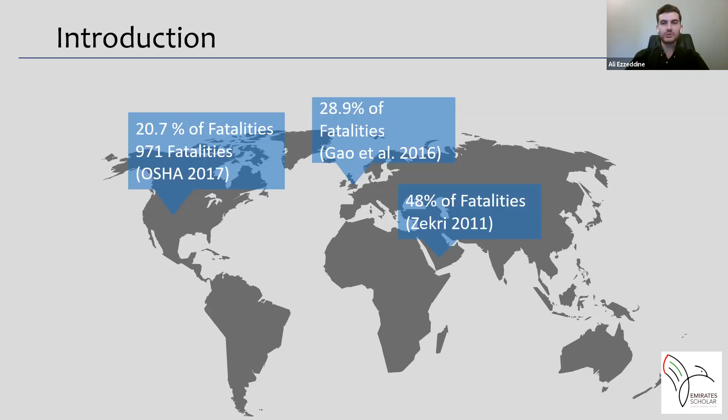And one way to mitigate safety hazards is through the proper implementation of training programs. Thus, more research in the past years has focused on enhancing safety training in construction. And one way researchers are enhancing safety training is through the use of game engine technology. So game engine technology started to gain popularity in construction around 2009, where Zhao et al. developed a training simulation to train excavator operators on how to safely maneuver in close proximity to dangerous electric hazards.

Then researchers started integrating 4D with safety training in order to create a more realistic training environment for the workers, based on the current construction phase of the project. And more recently, researchers are investigating the use of augmented and virtual reality to create a more immersive training environment. So all in all, research has shown that using game engines or serious games increased the motivation for training among workers. It facilitated the learning experience and had a more effective transfer of knowledge in comparison to the traditional training methods.

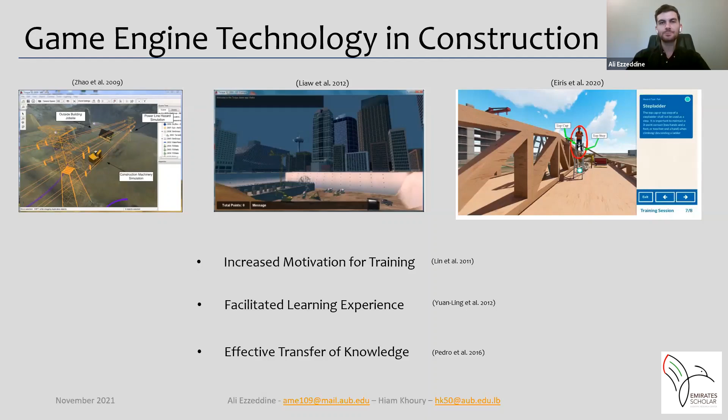So diving into our research, the overarching objective is to mitigate safety hazards through the development of a digital and integrated safety management system. The system is made up of 3 components. The first component is related to the integration of safety and construction activity planning. The second component is related to safety training and assessment, while the third component is related to resource allocation. So the system is used to connect the data from all 3 components in an integrated digital platform.

Planning-related data such as execution dates and risk scores of activities are sent to the second component, where the safety training and assessment scenarios are developed in a virtual environment based on the inputted data. And after training and assessing all workers, the data collected, such as their safety performance and the risk scores and resource requirements of activities from the first component, are sent to the resource allocation component.

However, believing that the need for technology should come from the people, this research focuses and presents our work on the second component related to digital safety training to test if workers in the Middle East are ready to accept and use this technology. So in this context, the objective of this study was to develop a location-based safety training and assessment tool, which trains workers based on their specific activity in its upcoming execution location and assesses their performance and gives each worker a safety score. And the second objective was to test the tool on workers from the Middle East and to obtain feedback about the tool and its potential adoption in the Middle East.

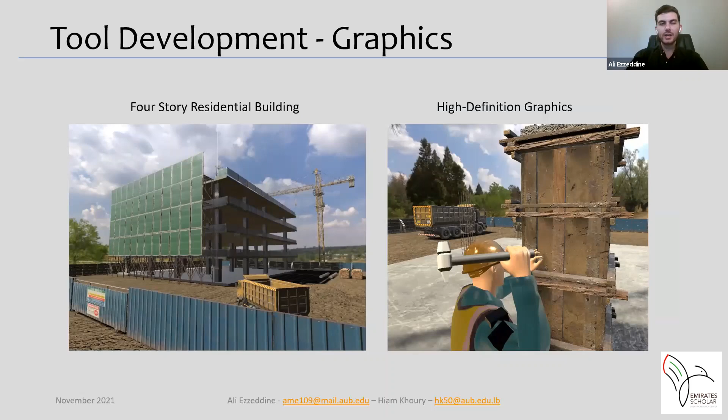So we had a 4-story residential building, and we used the HDRP pipeline to create high definition and high fidelity graphics to create this realistic feeling for the workers. And this is how the UI was built.

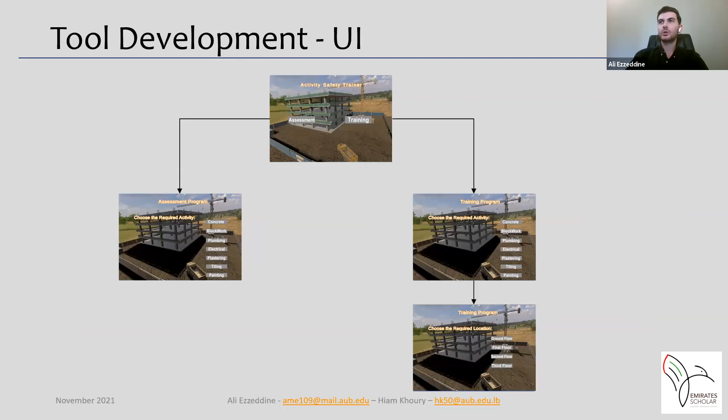So the user first must choose whether they want to enter the assessment or the training program. If they choose the assessment, then they will choose the activity they want to be assessed in. If they choose the training program, they will then have to choose the activity, and they will have to choose the location in which they want to be trained in.

As for game controls, they were developed in a way to be user-friendly so that we take into consideration that some workers might not have any gaming or computer experience. So the first controller is the keyboard, where the workers will use the arrow or the WASD keys to navigate through the site, and they will also use the mouse to point at and click certain objects in the game.

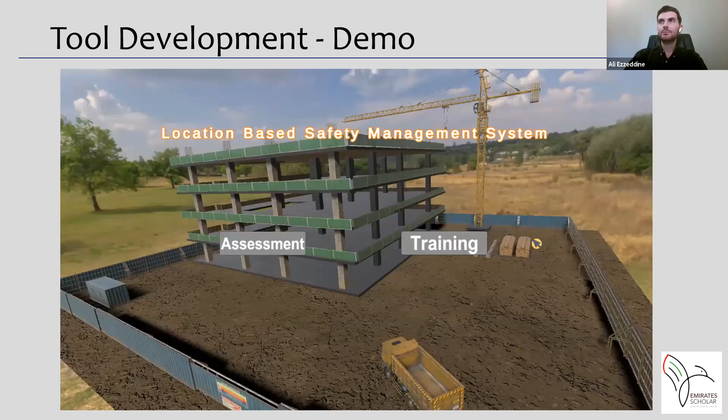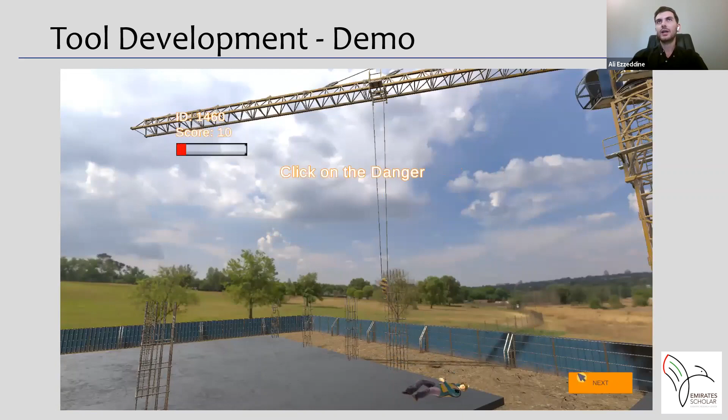So here I'll show you a small demo of the training tool. So the user goes to the assessment program and to the concrete activity. And here we can notice that each worker has a unique ID, and the score increases each time he identifies a safety hazard or a safety violation. And the score is between 0 and 70, 70 being the highest score.

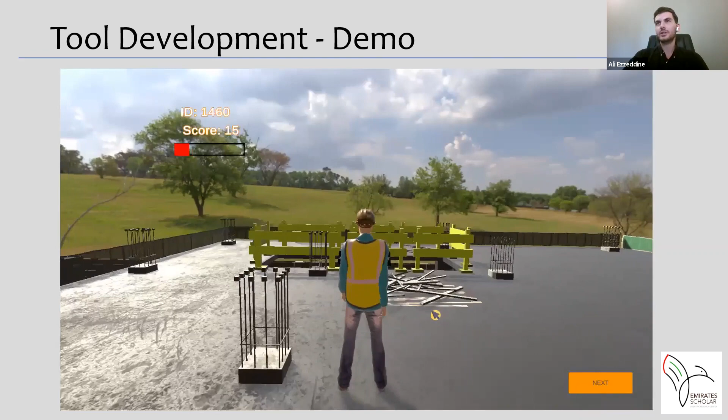So here, for example, we have missing rebar caps, which can endanger a worker if he falls onto the rebars. Here, some objects are thrown next to an opening, and even if we have a barrier, it's a dangerous thing to put objects near an opening. And for the sake of time, I will not go through the whole demo.

So after developing the tool, we tested it on 25 construction workers. We had 3 age groups between 20 and 30, 30 and 40, and greater than 40, and 3 experience groups between 0 and 5, 5 and 15, and greater than 15 years of experience.

We noticed that the majority of workers obtained acceptable safety scores, where 10 obtained a safety score in the medium range. And as a reminder, the safety score is between 0 and 70. So 10 had obtained a medium safety score between 21 and 45, and the remaining 15 obtained a safety score in the high range between 47 and 70.

High safety scores reflected the following results, where most participants acknowledged that the game increased their motivation for training. So they were intrigued to obtain higher scores. And they thought that the game helped them increase their risk perception skills. And finally, the workers validated the scores by acknowledging that their safety score truly reflected their safety knowledge.